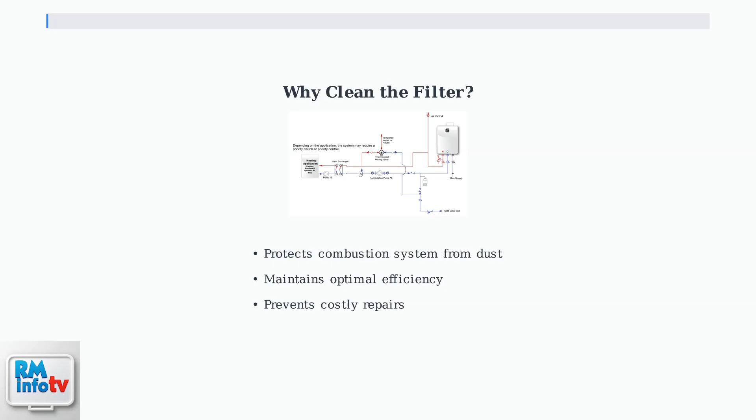Step 1 is safety first. Before beginning any maintenance, you must turn off both the electrical power and gas supply to the unit. This is absolutely critical for your safety. Step 2 is accessing the filter. Remove the front cover of the water heater using a screwdriver. The air filter is typically located at the bottom of the unit beneath the front cover.

Step 3 is inspecting the filter. Examine the air filter carefully for any signs of dust, dirt, or debris buildup. This will help you determine how thorough the cleaning needs to be. Step 4 is cleaning the filter. If the filter is washable, gently rinse it with mild detergent or soapy water. Use a soft brush if needed to remove stubborn particles. Rinse thoroughly to remove all soap residue.

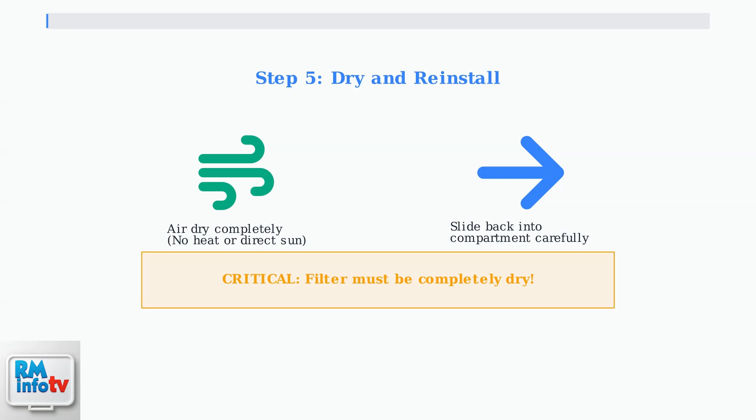Step 5 is drying and reinstalling. Allow the filter to air dry completely before reinstalling it. This is crucial. Any moisture left in the filter can cause problems. Once dry, carefully slide it back into its compartment. Finally, restore power to the system. Reopen the gas shutoff valve and turn on the electrical power. Wait for the water heater to complete its startup sequence, then test by running hot water at a faucet to ensure everything is working properly.

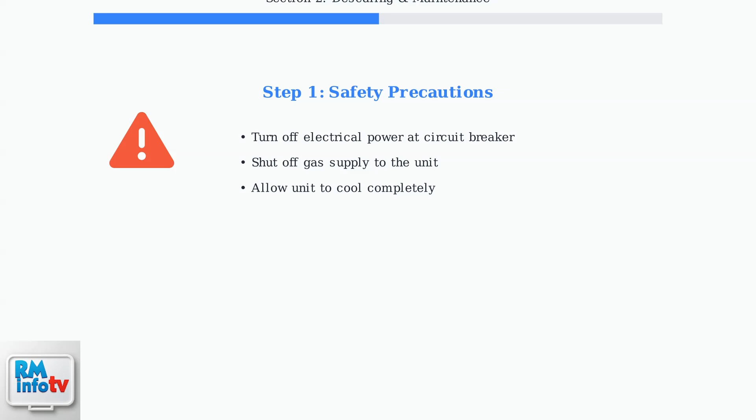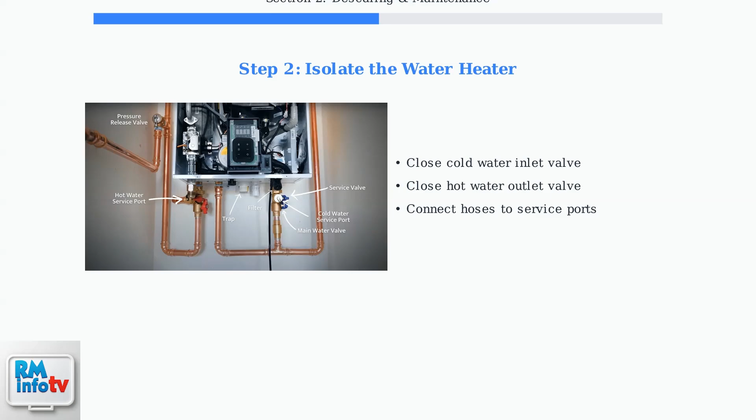Now we'll cover the critical descaling process and ongoing maintenance for your Takagi Tankless water heater. Descaling removes mineral buildup that reduces efficiency over time. Safety is paramount. First, turn off the electrical power at the circuit breaker, shut off the gas supply, and allow the unit to cool completely before beginning any maintenance work. Next, isolate the water heater by closing both the cold water inlet and hot water outlet valves. Then connect hoses to the service ports at the bottom of the unit.

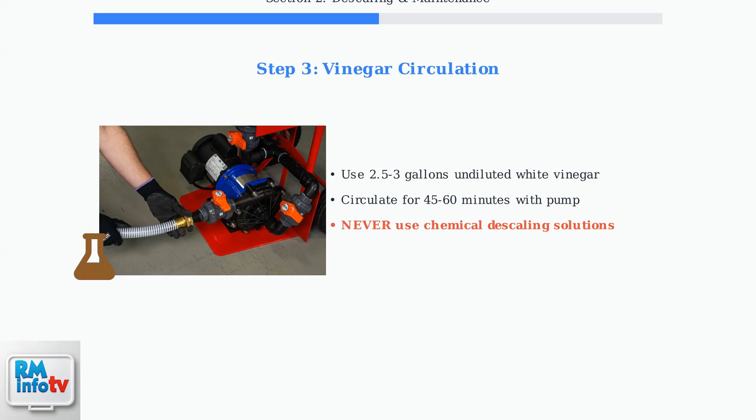Use 2.5 to 3 gallons of undiluted white vinegar. Circulate this through the system for 45 to 60 minutes using a submersible pump. Never use chemical descaling solutions as they can damage the unit. After circulation, flush the entire system with fresh water until all vinegar traces are completely removed. Clean the cold water inlet filter by rinsing it thoroughly, making sure the tab faces outward when reinstalling.

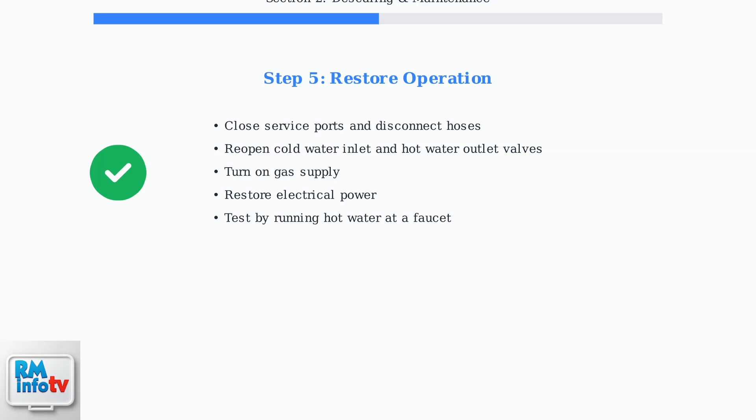To restore operation, close the service ports, disconnect hoses, and reopen the water valves. Turn on the gas supply, restore electrical power, and test the system by running hot water at a faucet. Perform routine maintenance at least once per year. Descaling frequency depends on your water hardness: every 12 months for normal water, but every 6 months if you have hard water with 7 or more grains per gallon.

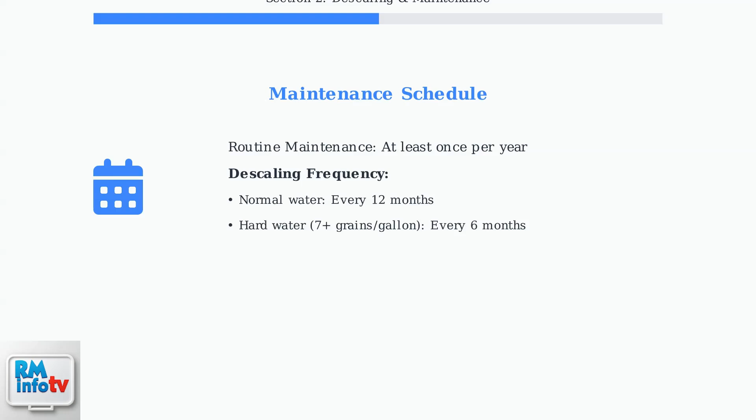If you're uncomfortable with any of these maintenance steps, don't hesitate to contact a qualified plumber or HVAC technician. Professional service ensures safe procedures, protects your warranty, and maintains optimal system performance.